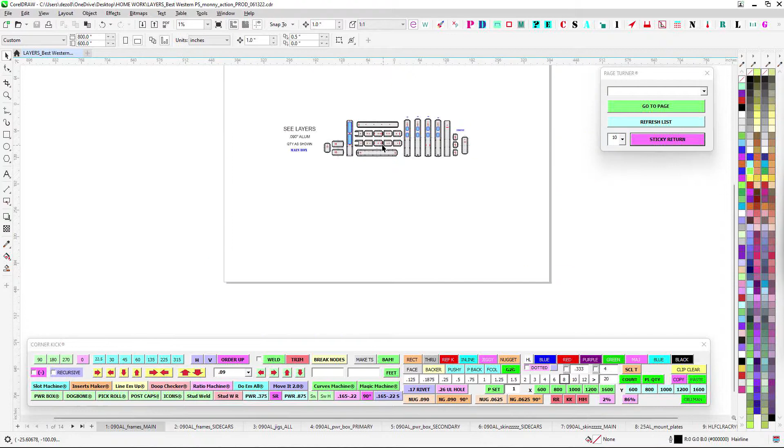So we got the lay of the land. You got your main box, all your 090 here. Just the way this is set up, because these little kerfs actually get closer together on this one. I went ahead and sent that over for a 3/16 bit, but the way the layers are set up, the all-the-way-through is kind of hidden under it.

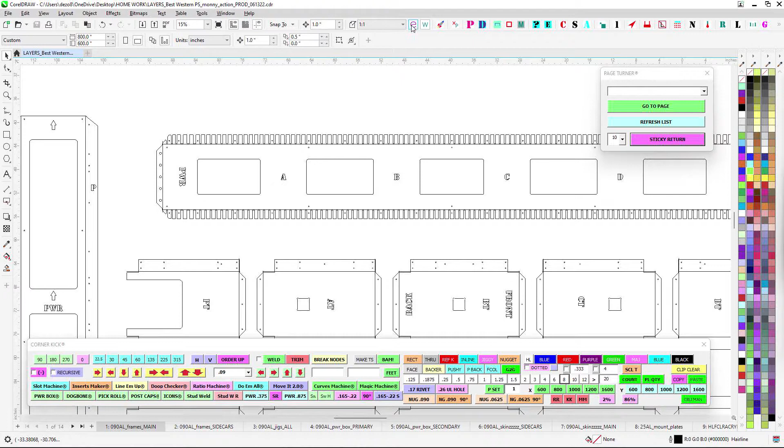So if you look at this, don't think that I forgot the openings on the top lid. They're just hidden behind on this layer. It's just how I have to send it to route, but they're there. Again, just got to make sure these kerfs don't get forgotten, because if the bit can't get in there, then the route won't route it.

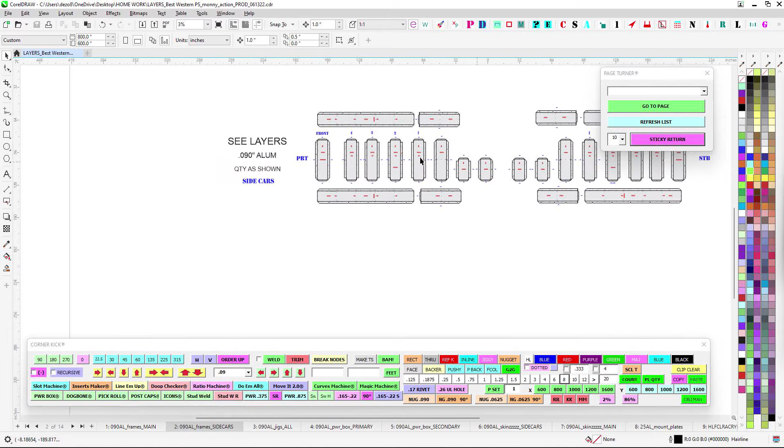So sidecars, we have both sides there, everything's there. And then I went ahead and put the jigs together. You have your top arc jig, a la Loma Linda.

These are going to be lift point jigs. I'm keeping those 090. You've got your main frames, they're just kind of thicker, you can see they just look weird. There should be 2 sets there.

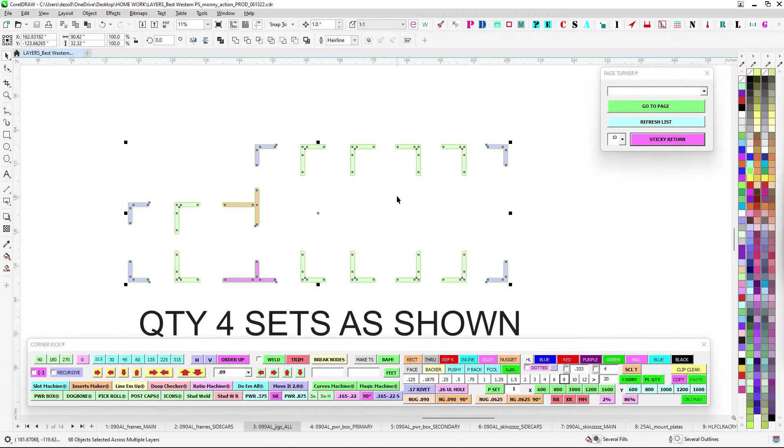And then your sidecar jigs are nice and thin to win, try to keep them slender. You got 4 sets there.

So the power box looks very familiar, just a little bit of adjustment, but this is a SOP mod. I took it directly from Eisenhower La Quinta that you just did, the curvy top. Don't tell anybody, but it'll just be our little secret, but we're doing one of those.

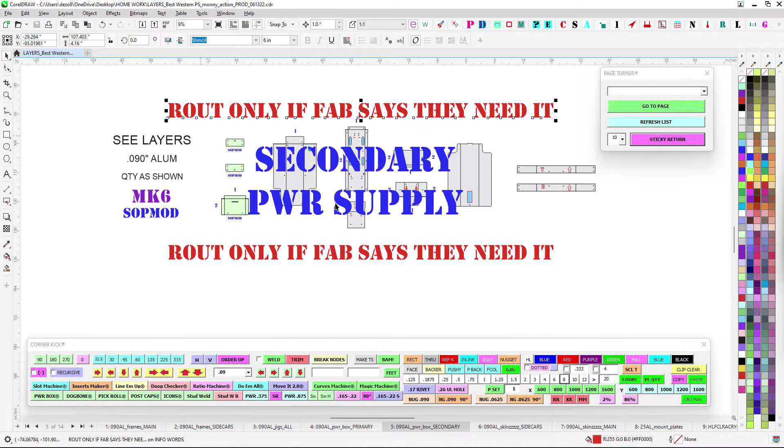Now secondary, as it says right here, just in case, because we're not doing the letters, they're sending the LEDs and everything, so I don't know what they're using. Maybe they're using 6 volt, maybe it takes 4 power supplies to do their letters. I don't know. So just in case you need another power supply, let's say it's 12 volt, you just tell them, tell route to do another one of these.

The point being that we're missing - I took the switch plate off this one, so I'll explain where this goes, but just keep this on backup. So you'll do your primary, that's why I call it primary there. This will be the one because that has your switch and everything. Then only if you need that one.

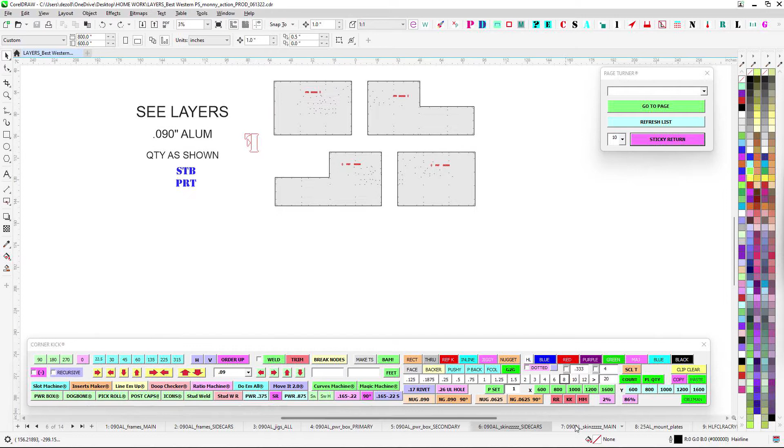So you got your skins. These are for your sidecars, because again, this side's pretty big, so everything's kind of broken up. And then this big boy, you got plenty of skins on this one. And again, this looks very familiar, Eisenhower, just a little birdhouse thing.

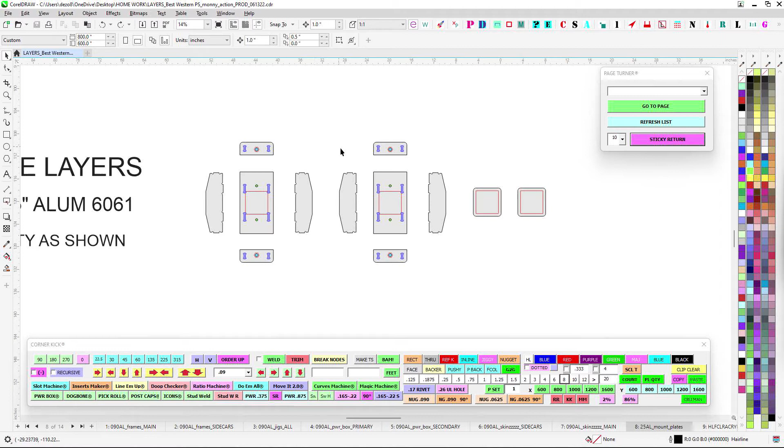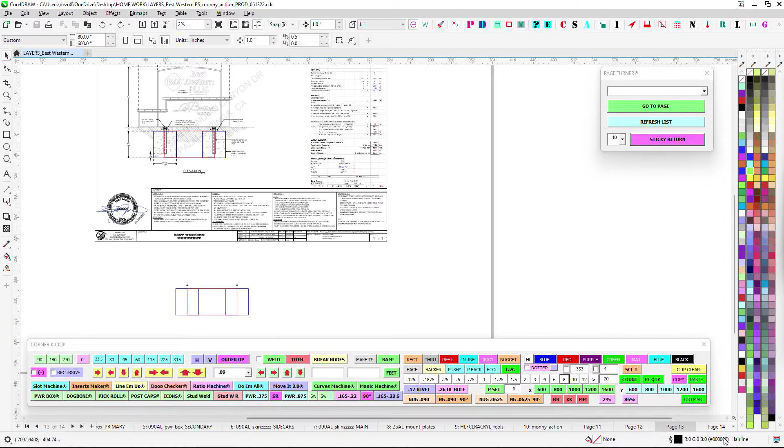All right, so let's go over it. In case you're not familiar, let's go over the main gist of this. You're going to have a center 11.5-inch wide main box. And again, this boy is close to 100 inches, so it's as big as your table. This thing's bigger than you think.

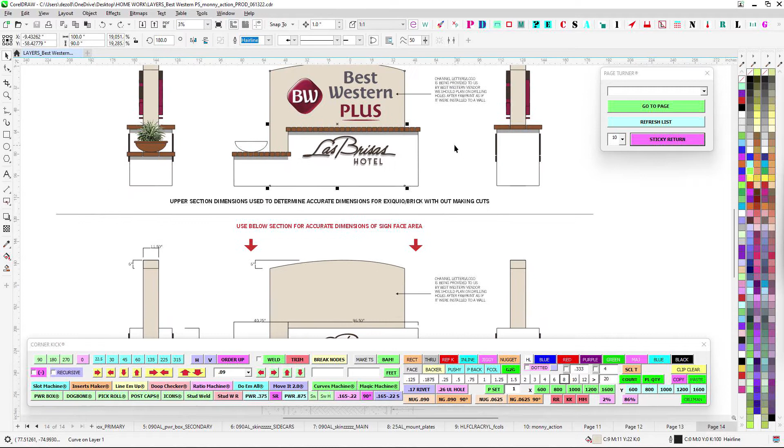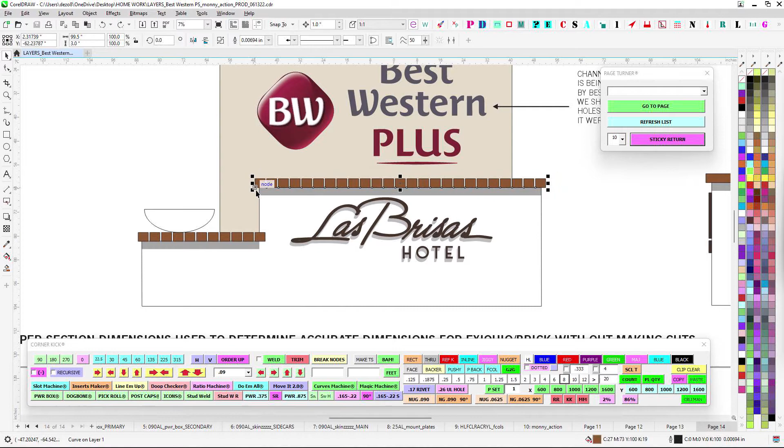Now you'll notice, and we'll get into this, but the sidecars are going to support brick. So Zeke is going to go out there when we're all finished, and he's going to go ahead and lay brick on top. So the sidecars need to support a little bit of weight. Like I also said, they're going to have to support some Instagram people just getting those snaps and whatnot, probably sitting on it. So just want to make sure that these sidecars are on there.

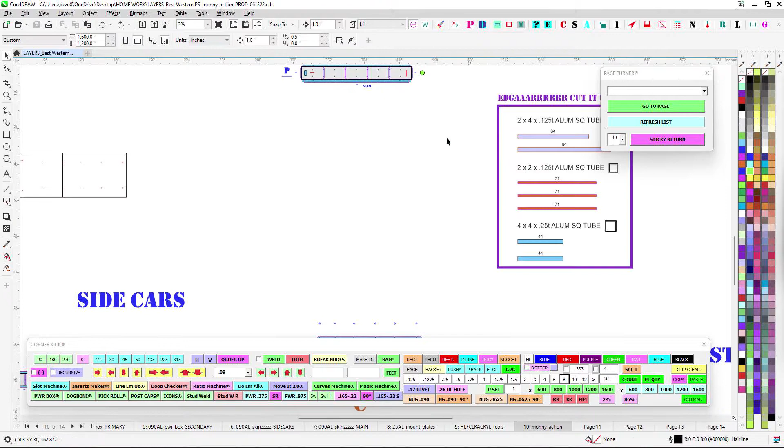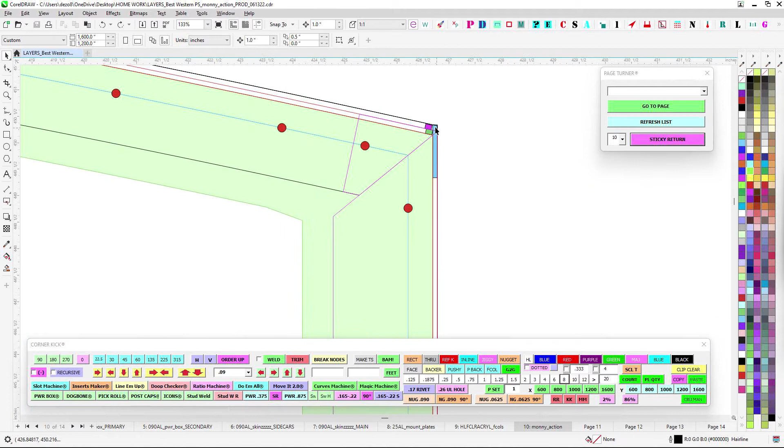You're going to have a removable top, but it is asymmetrical. So the frame is symmetrical, but obviously you have a front and a back side and all that. So technically it's not, so watch out for your A, your B, your C, your D, that way they keep where they're supposed to be. But this side that doesn't have the switch has no skin, so the skin in essence is sort of shifted over.

So you'll have a removable panel on this side, and the top is removable. But it dies out on this side, and then this side has no removable skin. So go ahead and build it up, slide it in.

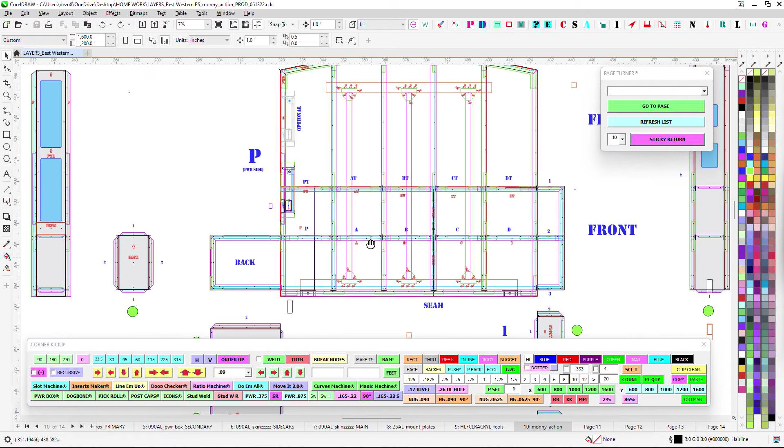I went 2x4 on this because this thing, you're not gonna be lifting it with brick, but it's gonna be heavy, so I got a nice beefy system for lifting. Go ahead and slide into your 2x4, run your 2x's down, and then you'll have your standard 2x runs across. Try to get it symmetrical.

I don't know what this measurement is. I could just give it to you right now, because you're like, I don't like to measure. So it's basically a foot, I'll just throw that right there. I haven't made the PDF yet.

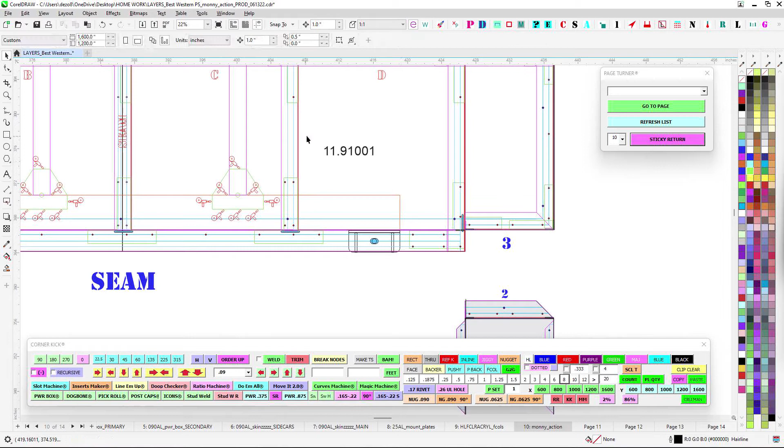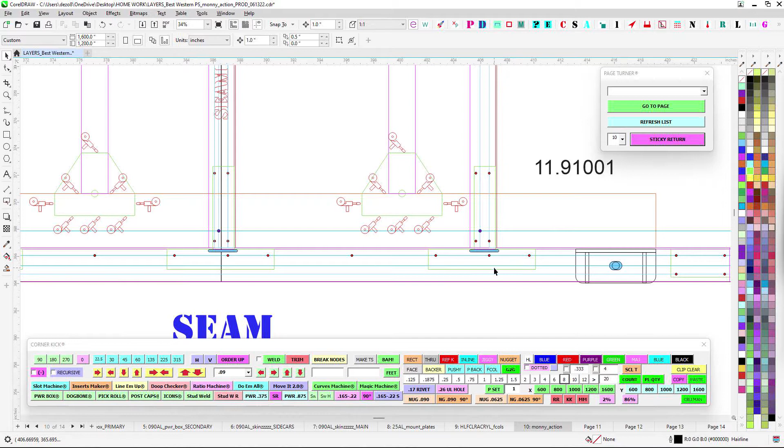These jigs, because we have all this room underneath, these jigs are going to be popping through, so you can tack it on the inside.

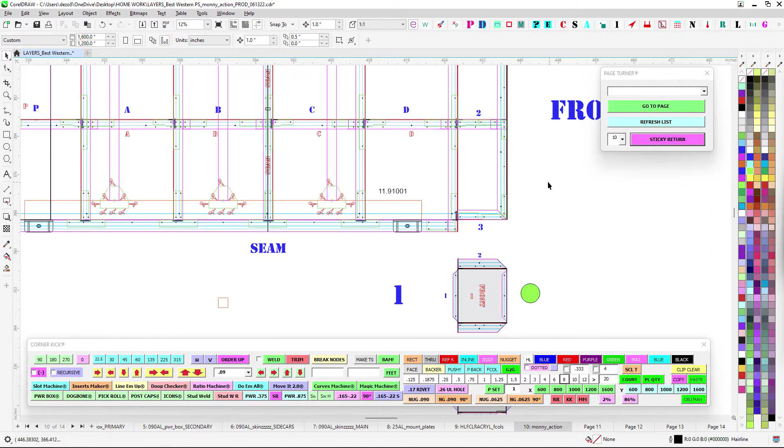As you notice, the frame for the center middle main box actually extends past all the way down, and our normal 2.5 pokes out. So this will be poking out, this will be basically grade. And then the sidecar boxes will kind of sit at ground level, probably backfill, make it look like it's in there. But anyway, this is the 11.5 inch wide frame.

Get all that taken care of, put it all together. Now you're going to have these weird, just sticky-outy frames that kind of, you can see where that's the main structure here. And then you're just going to have this little build-out box with these little guys here, and then you're going to have this long snout sticking out on this side. That just sticks out, that's going to be for sidecar.

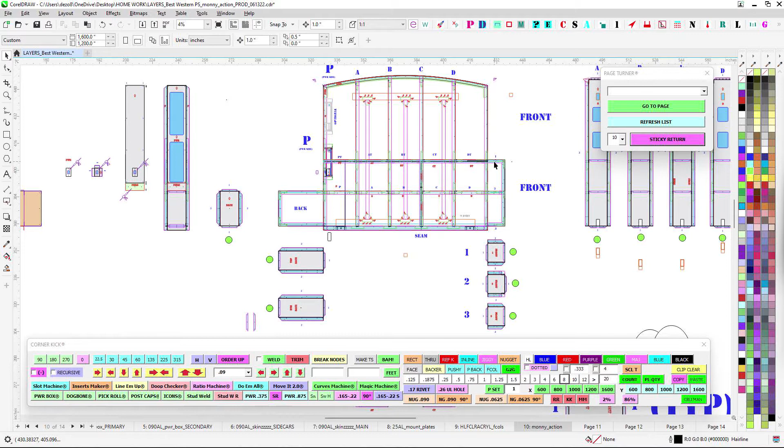So just frame that in, and then what you're going to do is once you get all this taken care of, your primary power supply goes here, just like you did with the Eisenhower. You'll have like an inside little bracket, tack that in there.

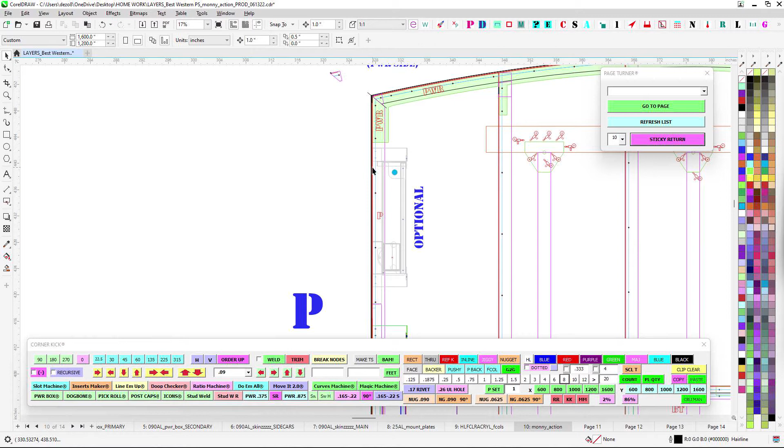And then hopefully you'll know by the time we get these LEDs, if not, we need to call and get an LED count to make sure. Otherwise, put this bracket for the optional, have them route it, and that's where the optional will go if we need it. I'd rather not have it in there though, that way there's room. Maybe put the brackets in, I don't know, maybe go ahead and route the brackets anyway, and that way they're there. I just didn't want them to be in the way when you're trying to wire this thing. But maybe we put the brackets and then we just don't do a mark if we don't need it. Anyway, we'll jump off that bridge when we get to it.

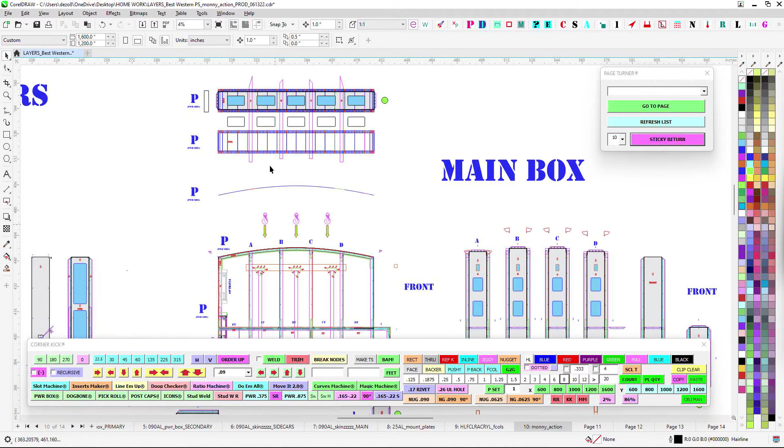Run your skin through the roller a little bit. You'll see where you have like power side lines up, you got power there, you got power there, that's just all this power side, because like I said, it's sort of asymmetrical.

So get your frame all built, get all that taken care of, then go ahead and skin this whole thing. Skin the 11.5 inch main box, get it all closed up nice, get it nice and strong.

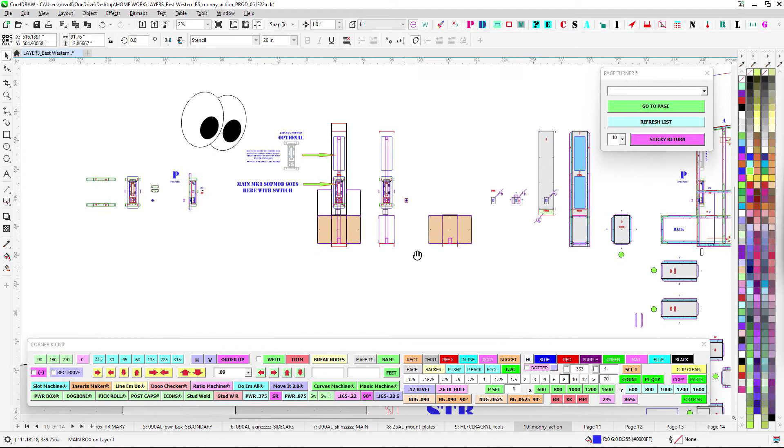Because this thing's so big, it is indeed in 3 pieces. So you'll put that piece on there and you'll Lord that to the front there, and then you'll go ahead and Lord that to the out back there and close it all up. So then you're sexy there, all done.

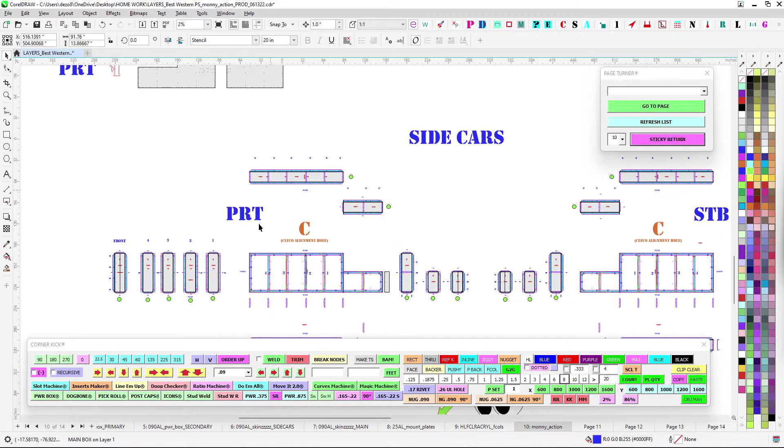Now, once you get that done, go ahead and build up the sidecars. Now, I'm calling it port and starboard. I know it gets confusing when you go right and left, but what's right and what's left when you're looking at it? Hence, nautical, boats, there's starboard and port.

Now, port is left, starboard is right, based on the bow. So I call this the front of the sign. So this would be the bow. So on this side would be the starboard side facing us, and on the back side would be the port side. That would be the left side.

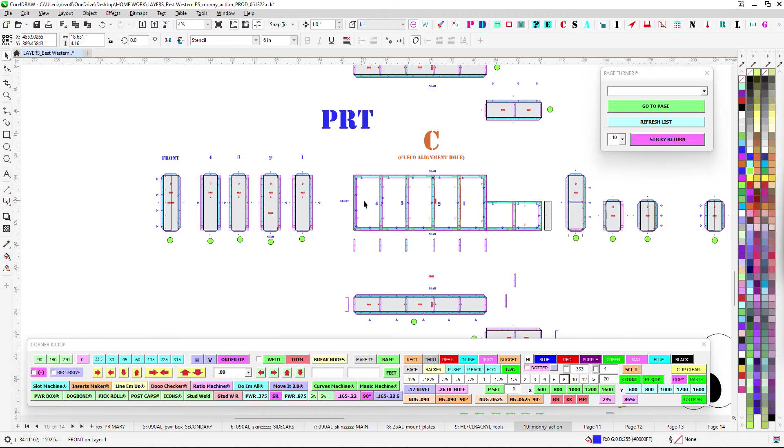So that's kind of how I did it here. So PRT, all these pieces are port, technically the left side. You can see here where you'd be looking at the back of it here, and then that would be the front.

And then on the other side, you've got your starboard. So look for STB, that's on all these pieces here. STB, are you down with me? And then you have port on this side.

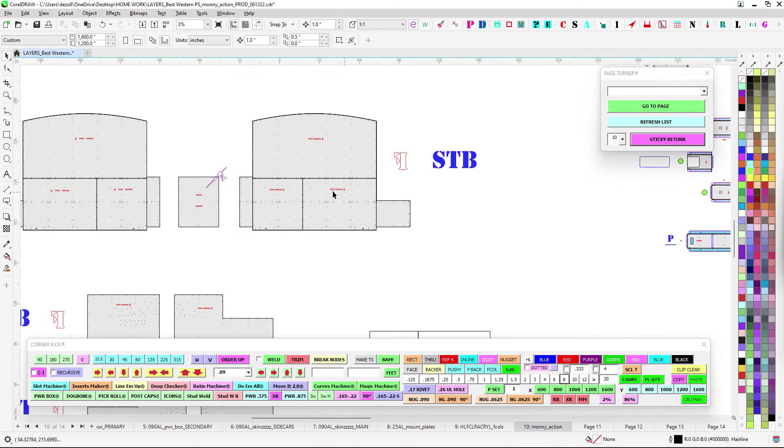Now, once you get all these guys built, just get the frames, don't skin anything yet. Then what you're going to do is lay this down like you do on one side, and then you're going to go ahead and put that frame, and it's going to line up. As you can see here, it's going to line up right along here. So you can see where this box represents where that frame hits.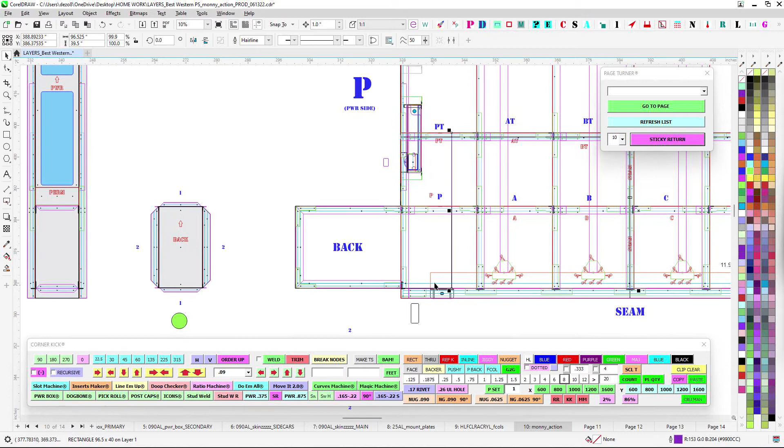And it's going to utilize the skin here. And then I also have it attaching to frame points along the inside here. And then it's going to continue out and mate up with this little snout that sticks out the back, and it's going to mate up with the front out here. So that way, this is a side view, but you'll have sidecar, you'll have your mainframe little snout thing, and then you have your sidecar here.

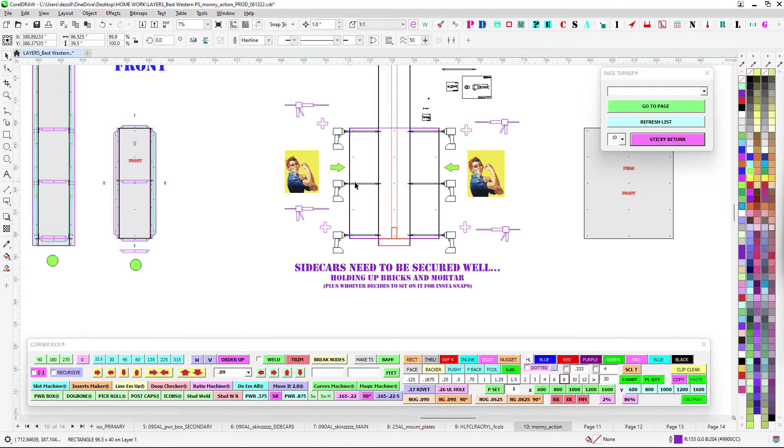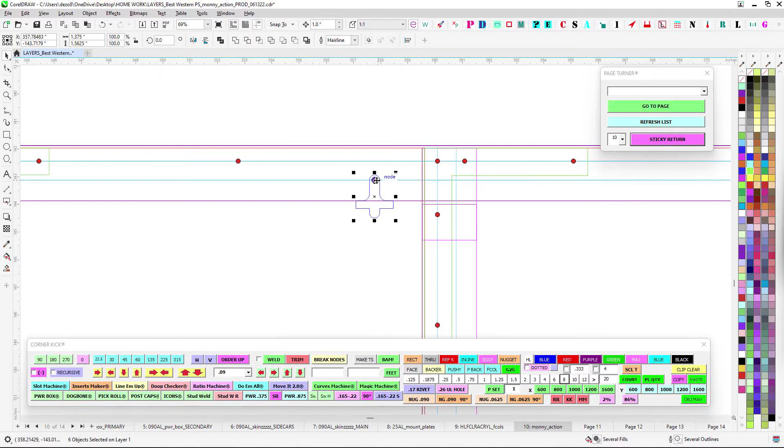So that way they can come right through. And I'll show you, I got some notches for that. So you see where each of these custom little things here, these are going to give you the notches you need to access the screw in the back. So if you look here, I got notch there, and notch and notch. That right there corresponds to your 0.22. That lets you have a direct shot to the skin, and you're going to frap that down nice and strong.

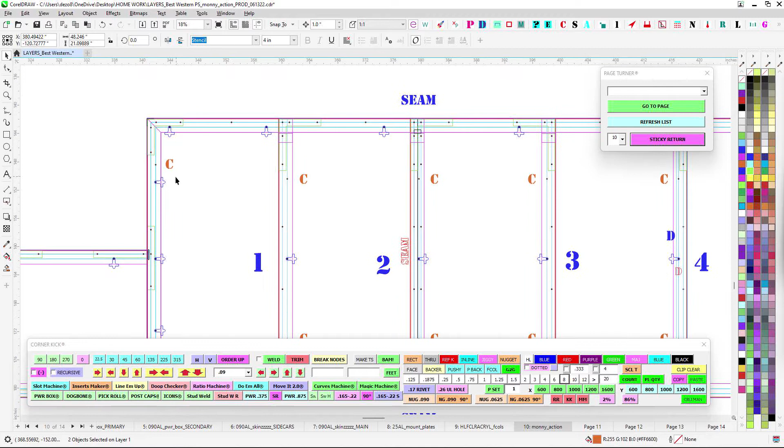Now I also have some Cleco holes. I have those in orange on the reference sheet. Obviously the hole is not orange in real life, it's just a hole, so you can't really tell. But you can see where I have these orange C's, they're kind of in a straight line.

That will probably, when you go to put the frame on, I know you're pretty good at this, you'll lay it, kind of get it all lined, and then you kind of do some Sharpie references for yourself. You'll see that those will be lined up on the skin. Let's go up here, so you'll see where the orange holes will be, that'll kind of go right along there. Oh, let me go back to here.

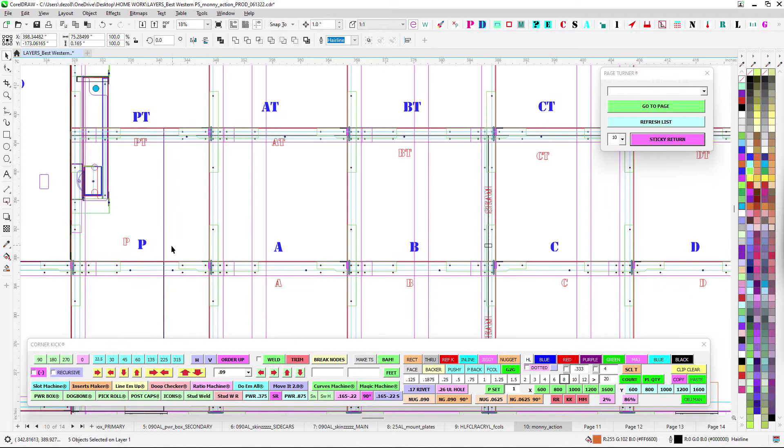Let me say, so I have T for top and just the letters. So I have P for power for these kind of middle pieces. So the A, B, C, D, they go along the bottom, and then AT is top, BT is top, CT. That way you kind of know which one's which for the bottom.

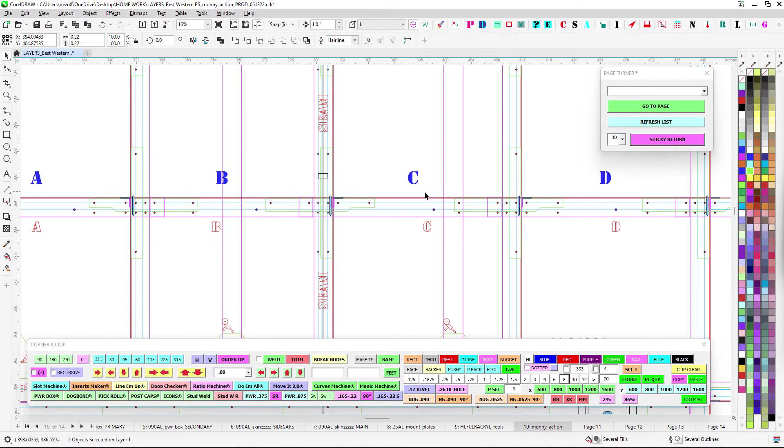Now, because these are asymmetrical, because where these holes for the sidecars land kind of made them asymmetrical, you can see where that hole for CT. So it's just important to make sure that's in the main frame before you close it up, kind of going backwards there, to just make sure you get the BT and the B and all that stuff.

Anyway, so that's that. So get the sidecars made, and then that's how you'll be able to just shoot screws on there. But use these Cleco reference holes, the orange ones. Where were those orange ones? Where'd you go?

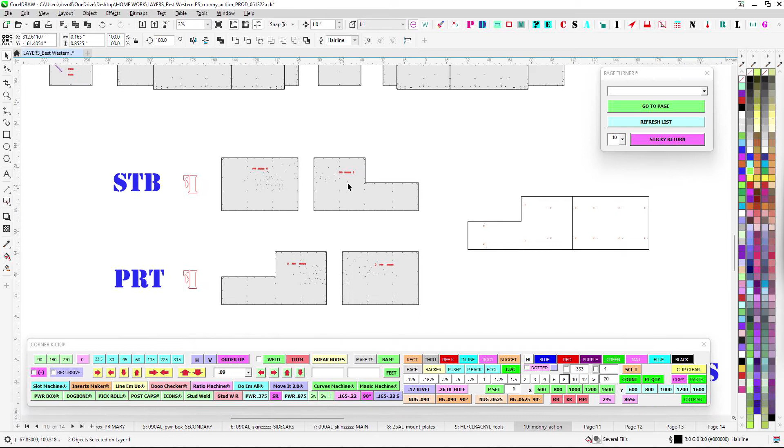There they are. Yeah, so on the main skins, again, they won't be orange, but you can see where they'll line up right along there. So just look for those. Anyway, and then you're just gonna mimic that all the way around. Get those frames on there, and then go ahead and put your skins on.

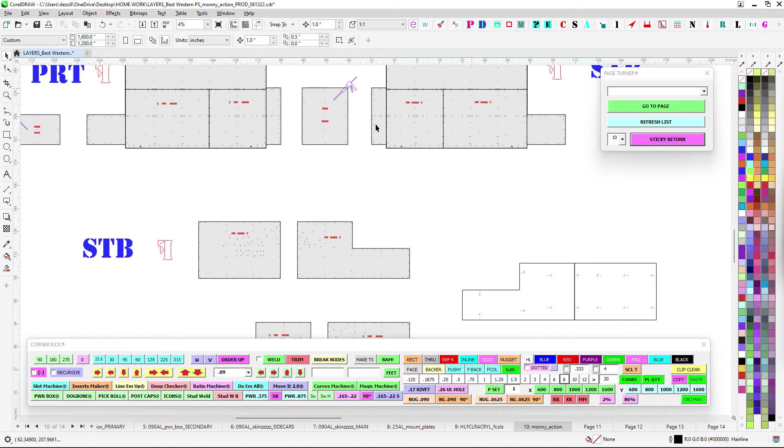Once you got both sides, get the frames on there real good. Then you'll have a triple stack of frames. So I know I'm jumping around here, but hold on. So you'll have this sidecar frame, which is almost 11. You'll have this main frame, and then you'll have the sidecar. And you know that our bends will be nice and round.

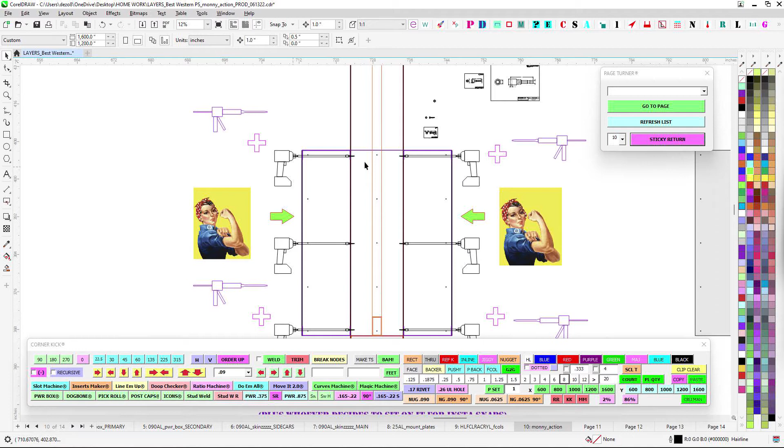So I was thinking that these frames are going to be like, this Bondo seam will be crazy. And we had issues before of trying to make that disappear, and who knows what's up. So I went ahead and did the cost of doing a permanent piece of 090, and that's going to go along the front. It's going to be a permanent skin.

You'll see you have Cleco alignment holes here. So you're just going to go ahead and Lord's this on really well, and that's going to go ahead and close up those seams for prep. And it's actually going to be, just spend a little bit, and then it's going to be a lot better.

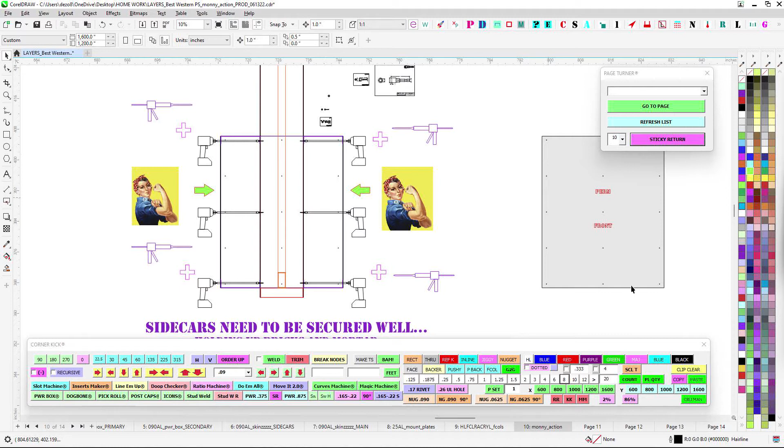So you'll Lord's these on. So once you get sidecars all skinned up and everything, you'll Lord's this on, and then you have one on the backside that'll kind of close up the backside. You see it there, same thing. So that way all three frames will be one.

And it also, because this thing's already going to be super strong, but this will give you torsional rigidity. It'll give you shear strength and stuff, so that way you can't twist it like a dish rag or anything.

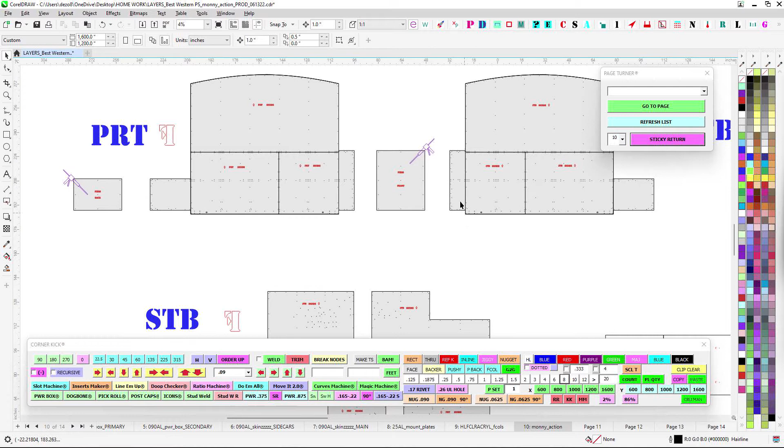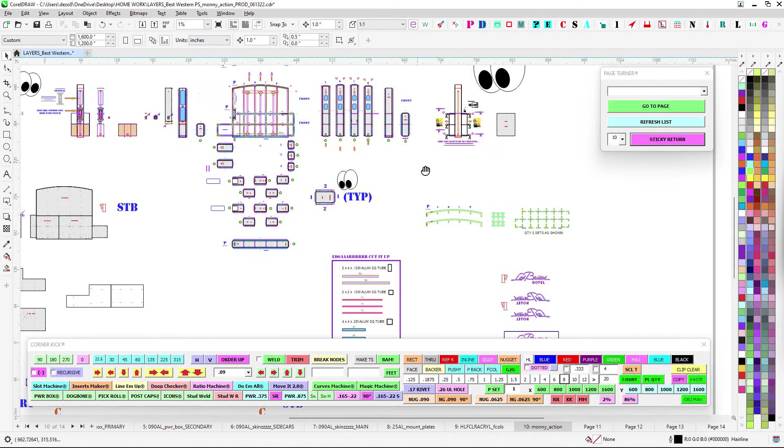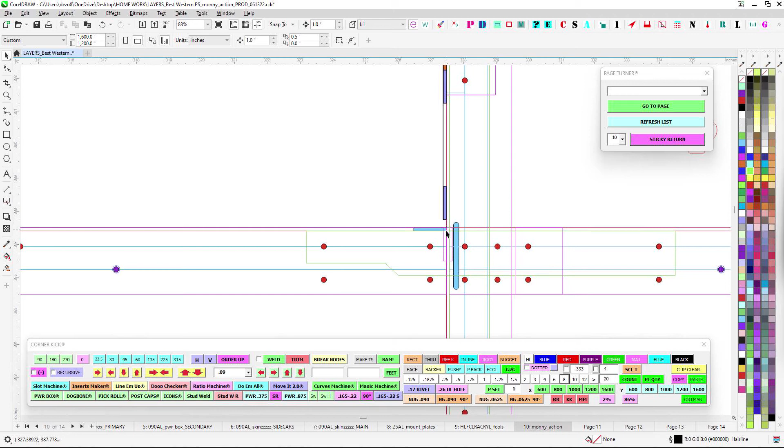You'll see that because the brick is going to be supposedly 3 inches tall, plus it's going to have like a Hardie backer and stuff, so it's probably going to be closer to 4. So you can see where this purple is the permanent little skin piece, and our brick will be right about here. And then that way our door starts there. So you'll have a seam that's visible, but oh well.

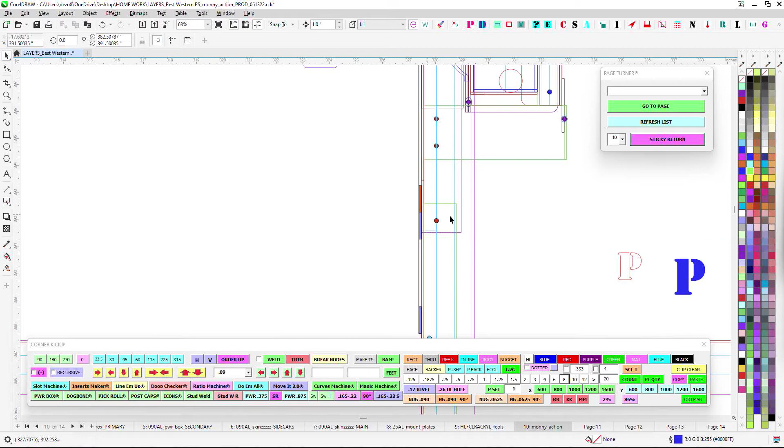But make sure you don't miss that. We do that sometimes. I think even on Loma Linda and stuff, some of them have a permanent little bottom piece, and then our door starts. So keep an eye out for that permanent piece.

Get that Lord's on there. That'll be for the brick. And then you don't have to worry about anything over here. This is all permanent side.

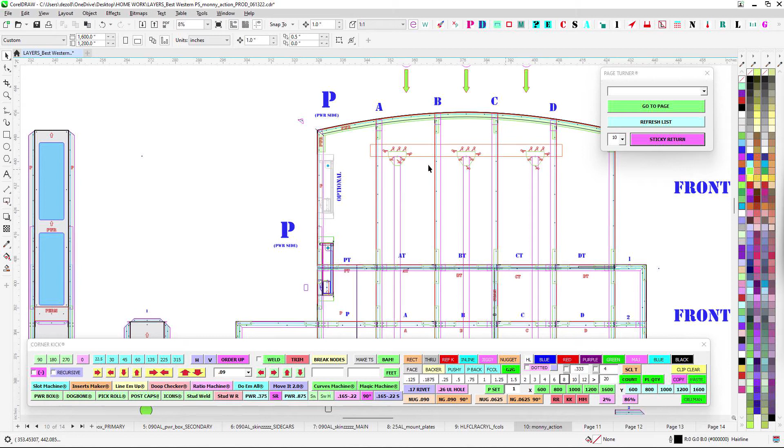And then when it comes time to wire this, like I said, we're going to be provided a paper pattern from whoever. And then we're going to have to install that on here and drill our holes. And then I did the best I could to give you as much room without having to have a door on this side, so you can kind of access everything from the top and kind of work your way over and get your wires and stuff.

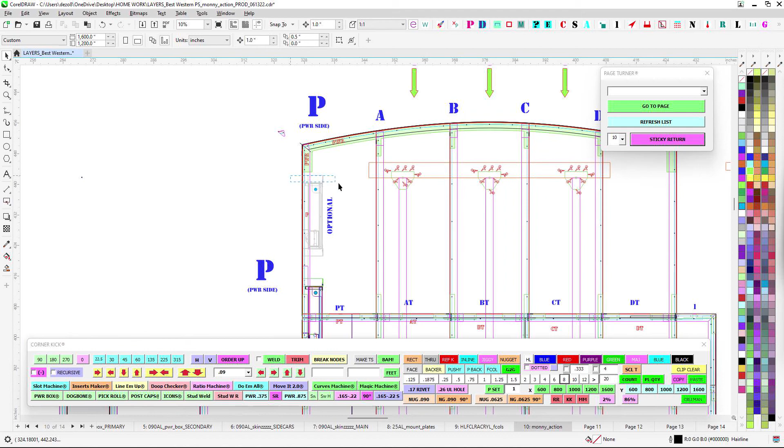So like I said, maybe we can conference, possibly, maybe it is okay to put these brackets in just in case. And then this is Alma's job too, so we can talk to her and see if she can get a rundown for LEDs, how much power.

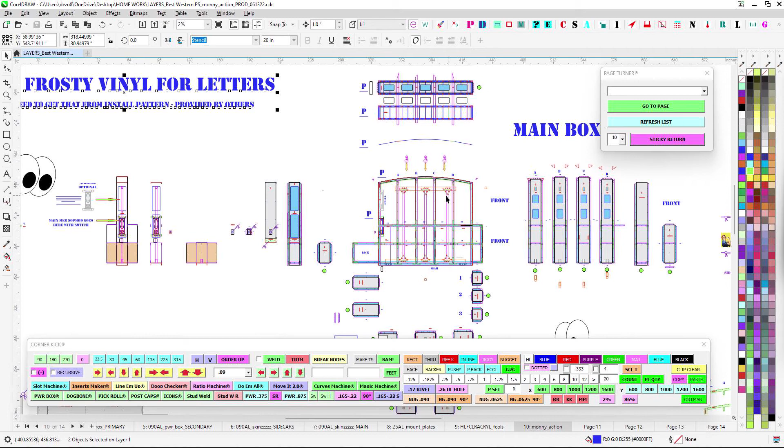And then in our new way we're doing stuff, make sure these will need the Frosty letters. But again, since we won't have the file, we're going to have to ask for a digital version of their letters, so that way we can cut out a vinyl, and then we're going to have to put the vinyl on with the pattern and all that. So a couple extra hoops to jump through, but let's not do that like we're doing.

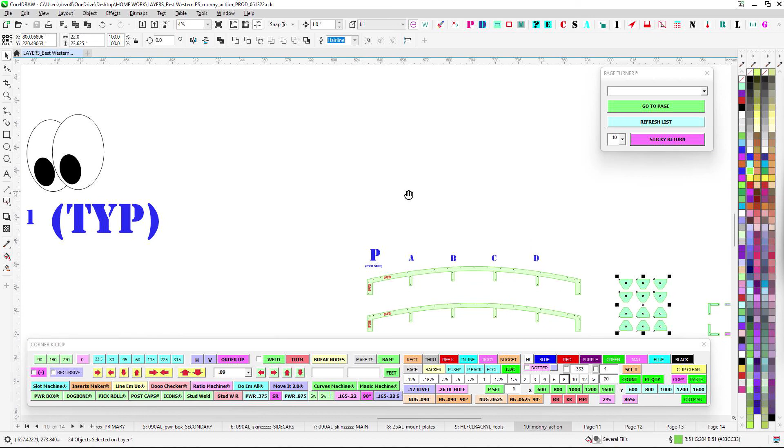There's your cut list. These guys here, I went ahead and did for our lift points. I kept it 090, trying to keep it on the cheap tip, inexpensive tip there. You're just going to go ahead and burn those, just kind of line up the point right there, and then just kind of burn it on both sides.

That'll be your lift point, nice and strong. I even gave you a little plug weld, rosette weld there. Again, just trying to, because this thing's going to get heavy. We're not lifting it with the brick, like I said, but it's going to be heavy. So we want to make sure that's all welded up really nice.

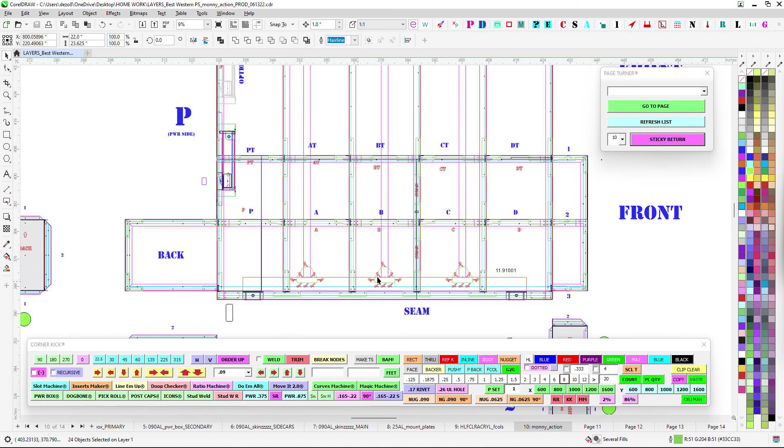So there's that. Let's see. Just want to make sure I got everything covered. I think that's it. So right on.